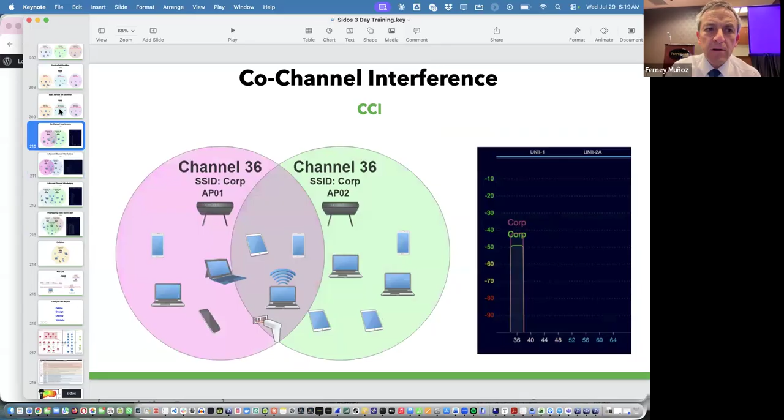Let me see if I found a better graph that helps. Let's just say this, okay? Let's bring this one.

I actually think I have a better one in it. Well, because this is all from one AP, but let's forget the one AP for now. If I have right here in this place one AP covering this area, and then I have access to multiple APs in different channels for high density, that's good. Because then I can limit that each AP receives, I don't know, 50 users. And then I'm going to have capacity available for multiple devices. I can have 300 people here, and some people will join one AP, others a different AP, but we need multiple APs in the area.

Now, why are we talking about this cell overlap? The good one, of course, is that there are multiple channels. You need multiple signals in a place to provide for roaming. If I am connected to one AP and the signal is getting weak and I'm moving along the way, what do I need to roam to another AP? I need another AP that has a good enough signal for me to just connect to that access point. So I need cell overlap. But what is the problem?

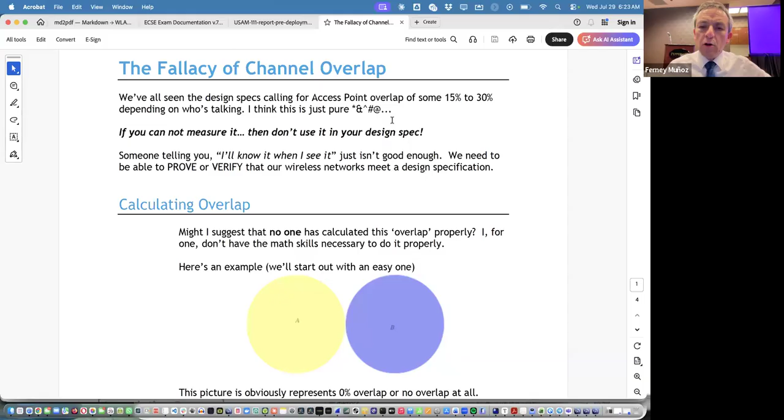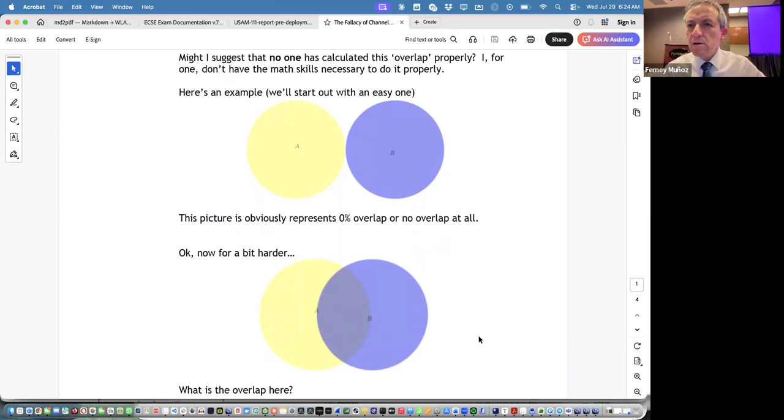Okay. How about now? Here's when I ask a question and you guys try to answer it. Guillermo, what do you think? What's the percentage of overlap of those two cells? 33%. Good, Prit. What do you think? Best guess, Ferney. Again, I can calculate that, I think, because it's a perfect sphere.

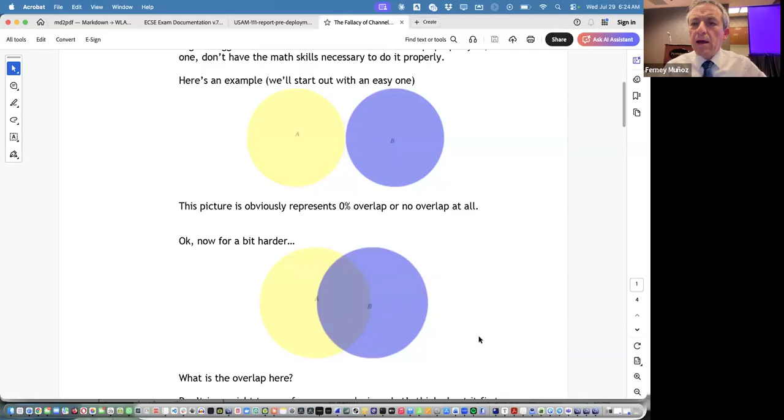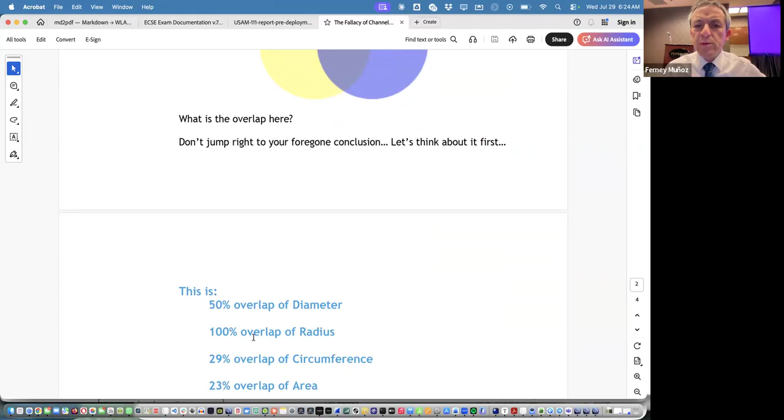And then the mathematician asked, what do you mean the percentage of overlap? Because if you analyze that, those two cells overlap 50% of the diameter. The diameter, of course, side to side, and you're only covering half of it. So it's 50% of the diameter, 100% overlap of the radius from the center to the edge, since 100% of the radius is being covered by the other one. It's 29% of the circumference and 23% overlap of the area.

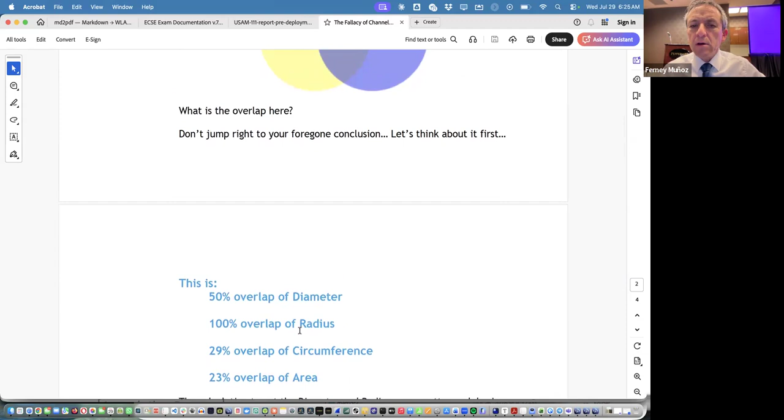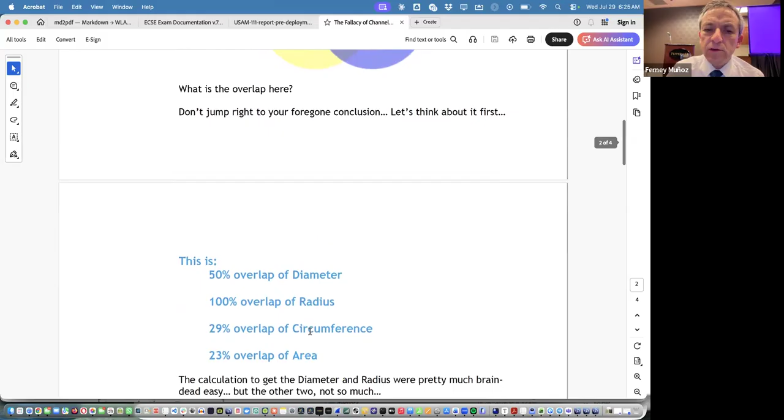So what percentage of overlap do you want? What are you talking about? And he said, oh yeah, that's right, I hadn't thought about that. But wait, you're a mathematician. How did you get to these four different percentages? 50% of the diameter, 100% of the radius, 29% of the circumference, and 23% overlap of the area. And the guy said, oh, that's easy with this formula.

I have not met a single wireless expert or Wi-Fi engineer that goes through and runs through this formula to calculate that 20, 30, 15, 25% cell overlap or whatever number it is that they are requesting or they are recommending. And he said, wow, that's a really complicated formula right there.

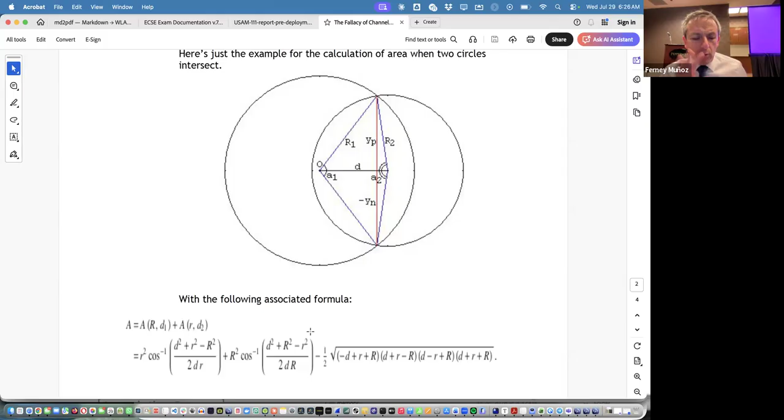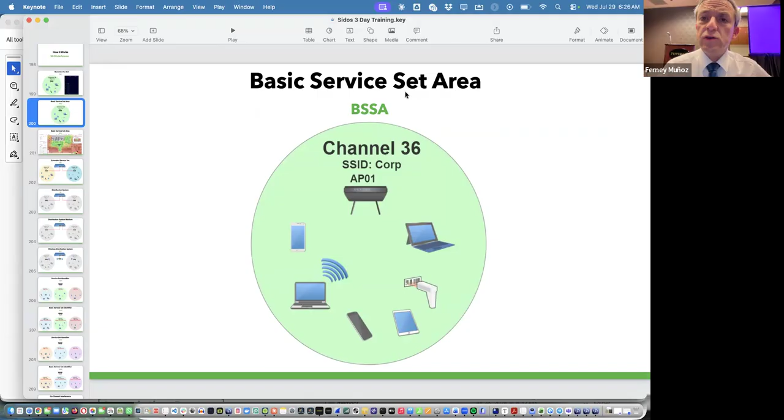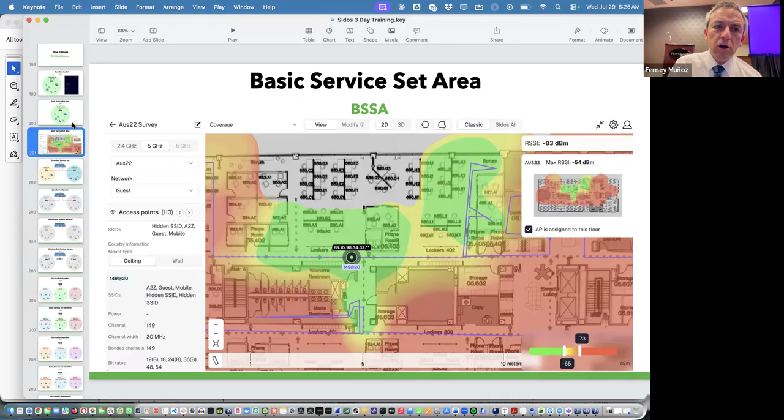But it happens that in real life, the cells we talk about when we are talking a basic service set, like the cell size and the area that this basic service set covers, is not a perfect circle. It just changes based on the environment. It's more like an amoeba. Even if you have an open space and you have an omnidirectional access point, the pattern is not going to be a perfect circumference. So he said, what if I do not have perfect circles, if I have these amoeba-looking shapes? How do you calculate that percentage of overlap?

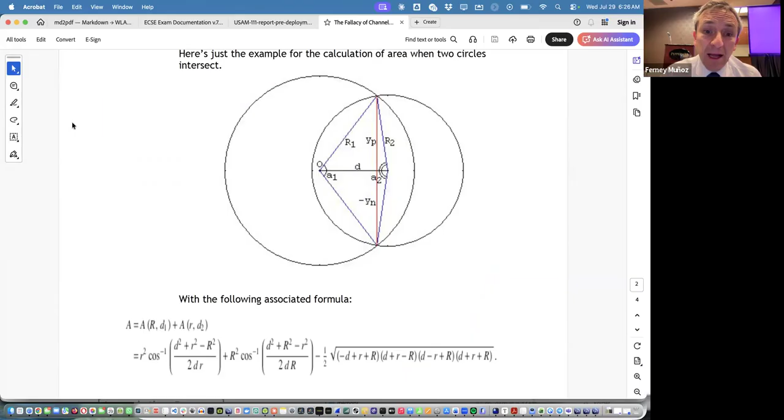And he said, no, you can't. You can calculate these percentages of overlap for these circles because they are perfect circumferences. In real life, for what we do in Wi-Fi, we cannot estimate this so-called cell overlap that customers and vendors and manufacturers of devices require. This device requires 30% cell overlap. It cannot be measured. It cannot be calculated. Why are we still requesting those from people and trying to put that as a requirement in any Wi-Fi project? It just doesn't work that way, okay?

This is one of the things that we in the industry have to educate our peers and our customers about, and I mean, this document is probably at least 20 years old. I wonder if there's a date here at the end. 2009. See, I was not far away. So it's about 17 years old. That's when this document was written. I have another version in Español.

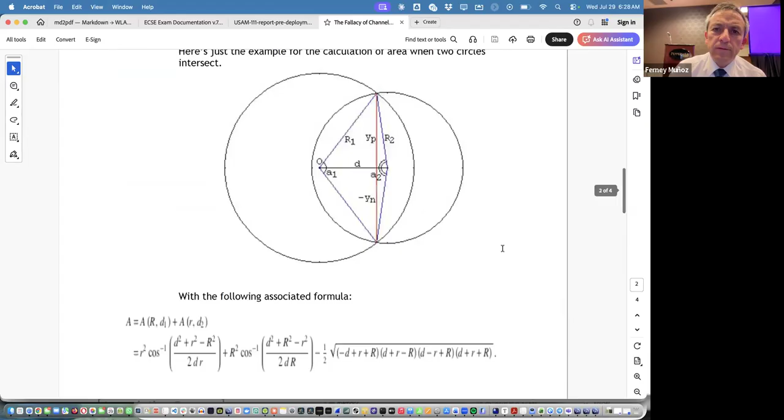These documents are, if you go to toolbox.WLANPros.com. Actually, I think I can open it here in my browser. I think that's what the shortcut was. Will it bring me here? Maybe not. So I can open it in my browser right there, or you can download the app. If you have not downloaded the Toolbox, download it. I also have it installed down here. Make sure this is the right one.

In there somewhere, I don't know if it's in educational resources or quick reference, but that document, the fallacy of channel overlap, is there somewhere. Have any of you opened that from here and know where it is? Let's see, I can make a search. Yeah, I tried searching for Fallacy. I couldn't find it there, but I found the actual document on the Wireless LAN Professionals website. Can you post the link on the chat? Yep, I already did. Okay, so there it is. You can just download that document and use it as a reference.

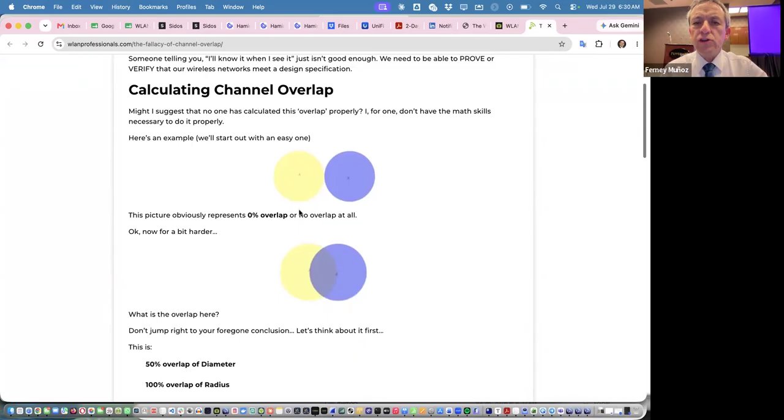So if you cannot measure this cell overlap, what do we do then? How do we tell customers, well, we cannot offer you 30% cell overlap, but what we can offer you and design for is to have a secondary signal, to have two signals covering the same place. So in design, let me just open. It's so hard to work with just one window.

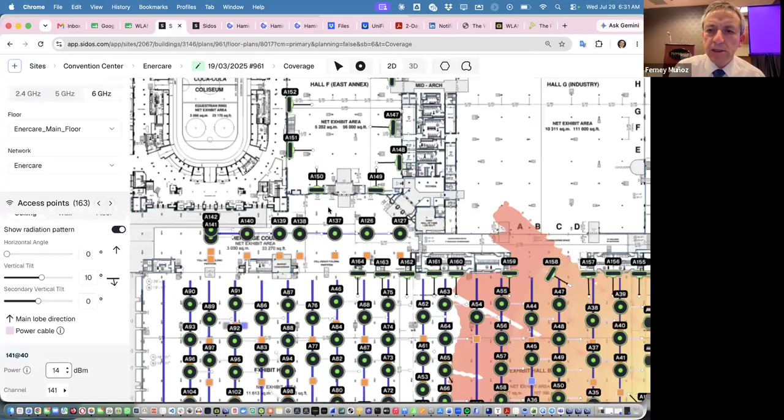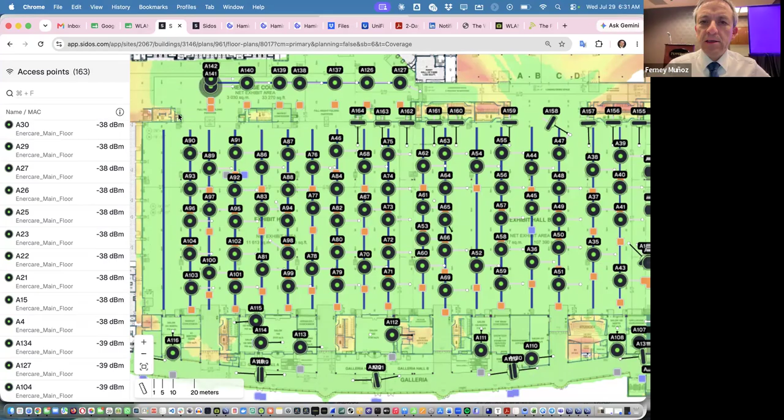Let me see if I have this design, for instance. Let me see if I can change the view from coverage to secondary coverage. So when we are talking about coverage in a design, it is basically where I have one signal at a certain signal strength. Let me create a copy of this thing, duplicate this guy.

Let me just create a new project over here. Let me change the size of this window.

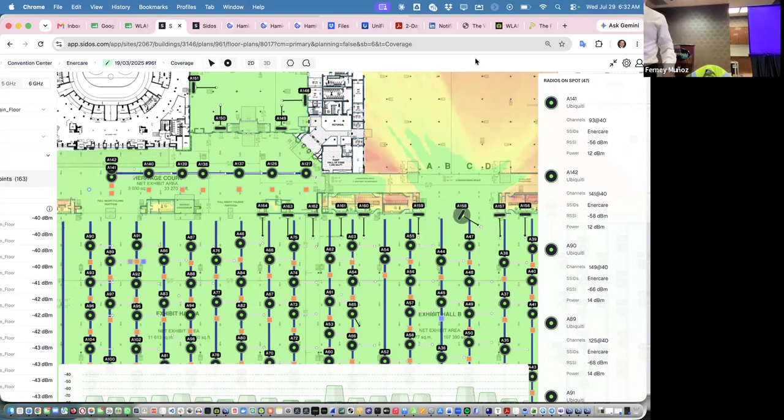No, I should get my glasses too. Give me a second. There we go. I can see now. I got my glasses on, man. I'm getting old. I used to see this just fine, but not now without glasses.

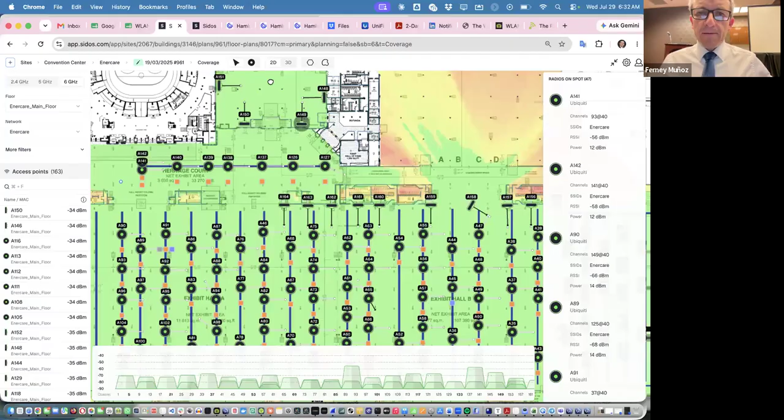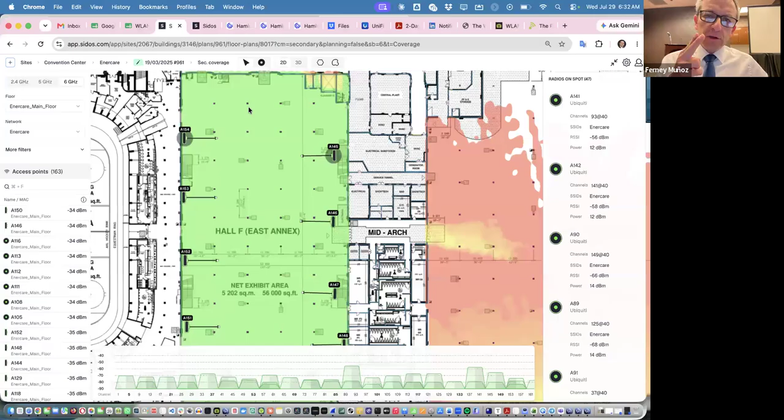So as I look at coverage, let me just use this side of the building. If I am looking at the first coverage of the primary signal, what this means is wherever I am, I'm going to have at least one signal that is at -65 or -67, whatever thresholds you have chosen in your design. If I look at secondary coverage, it's basically asking where I have two signals at -67 or better. Let me just use this space over here in this north hall area.

Just add an access point in here. Let's just put a Cisco 9105. Just change this to omni. That works. Just place one of these guys over here. I'm gonna have to refresh this guy. I had this open for a while. Sometimes you have to do that. One second, let me make sure that I have a file in here that is gonna work.

We create a new project in Ekahau real quick. Let me bring in a map. Loading. Ekahau's taking its sweet time. Oh, let me share my screen again. Looks like I stopped sharing.

Oh, looks like Martin is out there in the water. Hey, don't drop your phone in the lake, Martin. He's enjoying his day out there. It's good for you, Martin.

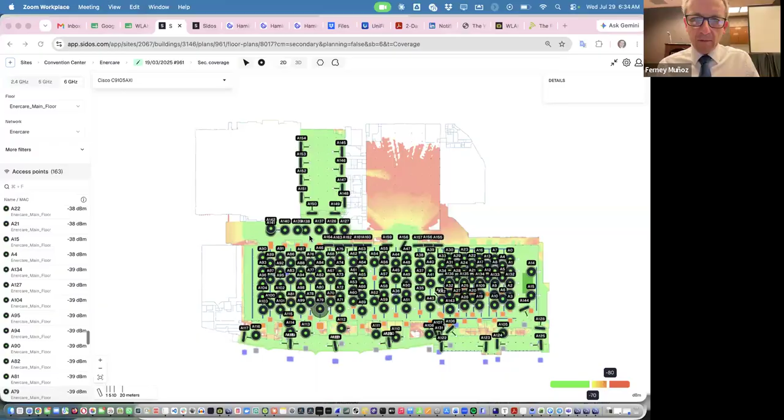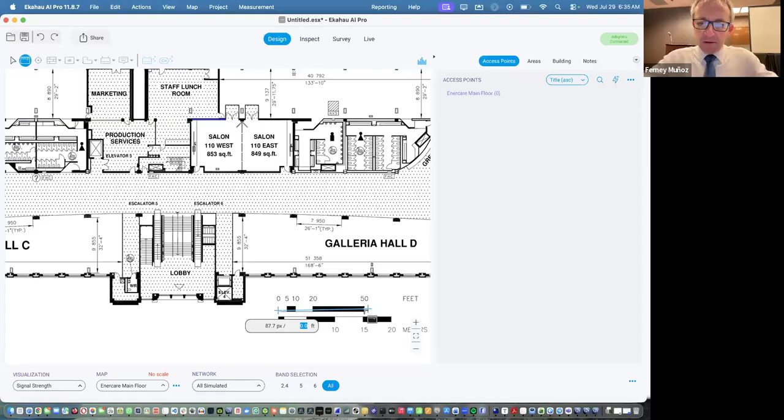Okay, come on, Ekahau. Loading, loading, loading. Here we go. I have this map over here. Let's give this guy a scale. Right here, this is 50 feet. Let's do it again. Right here is 50 feet. All right. So if I add an access point,

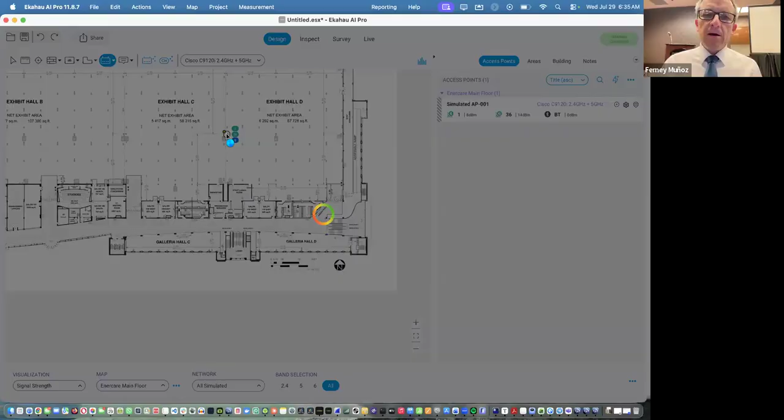get a Cisco 9120. Hey, we could even use that Aerohive AP, but it has negative gain on that. Let's just use this Cisco 9120. So if I place that access point over here, and since I haven't added any walls or doors or anything, Ekahau assumes this is one big flat open space. So this would be that AP.

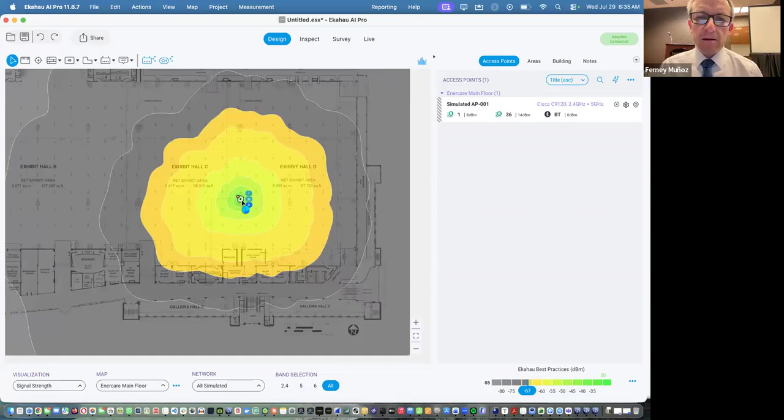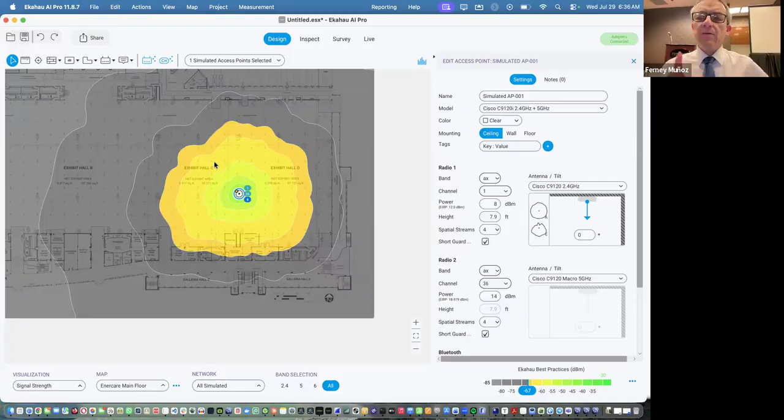Let me just move. Man, these windows from Zoom keep getting in my way all the time. So it's that AP with that radiation pattern at 7.9 feet from the ground, being an omnidirectional antenna. That's the pattern it creates. So what it shows is that wherever it is yellow to green, it's -67 or better signal. So that is where I have my primary signal, where it's good. Where it's gray, it says that it covers -85 or stronger. That'll be the threshold that basically will make other Wi-Fi devices stop.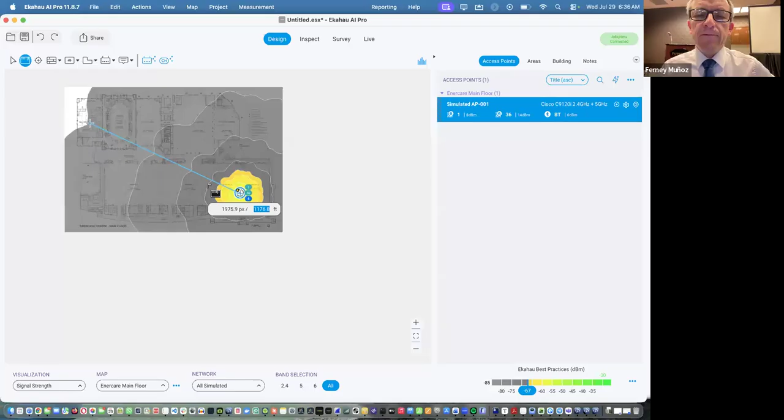If I measure the distance of the coverage from this guy all the way out here, I can still see it at 1,176 feet. This is just doing RF math on a big open space. Of course, again, I haven't drawn any walls or doors or anything in here. So let's just say, for instance, I need coverage in this entire space down here, so I'm going to have to add more access points. And this is not a design, okay? I'm just showing you the concept.

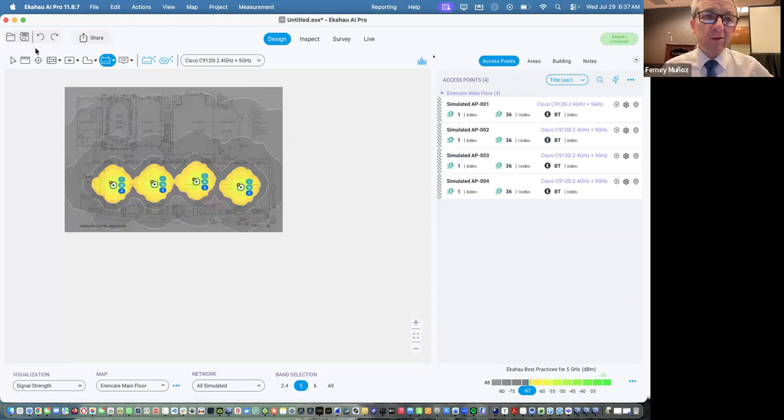If I want to have signals everywhere, just bring this guy over here, and then, let's say, with these 4 access points, I cover at least this stretch over here. If I look at 2.4, that'll be the coverage in 2.4. If I look at 5 gig, this will be the coverage in 5 gig. Yes, looks like at 5 gig, I'll have some gaps in between. So if I move this AP over here, then now I'm kind of getting there. Of course, there's going to be some gaps in there. So this is just a rough example to show you the cell overlap.

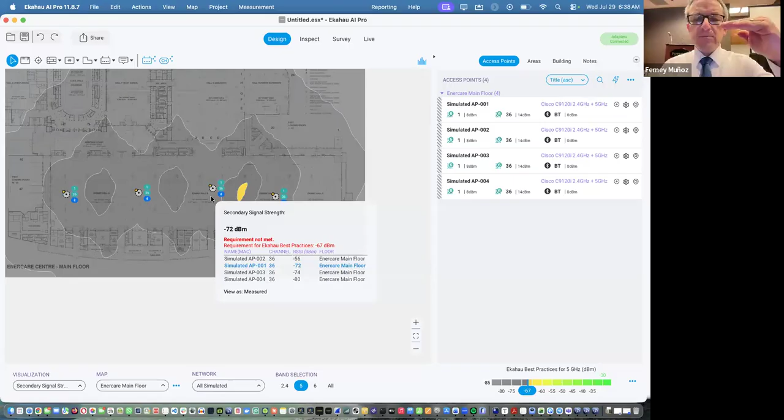So if I want to look at my secondary signal, because this is the first signal, where it's yellow to green, there is one signal at negative 67 or stronger. If I look at secondary signal strength, notice that what it says is that only in this area over here, there are 2 signals at negative 67 or better. And some people say, but why isn't there a signal right here if I'm under the access point? Because what Ekahau is estimating is the first signal right there is at negative 56, but the second signal that I can hear is at negative 72. So I'm not meeting the requirement.

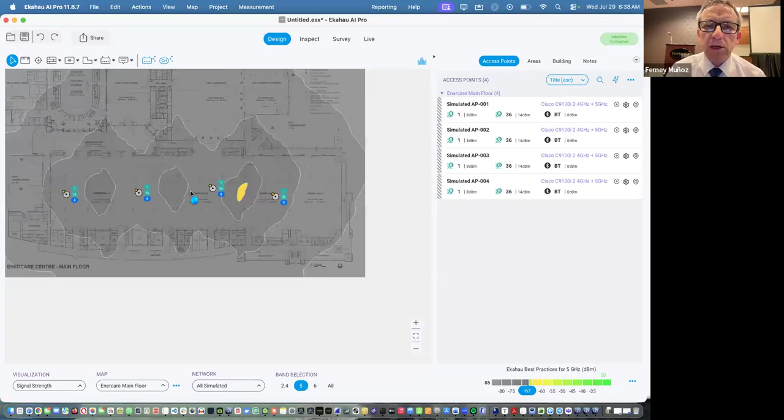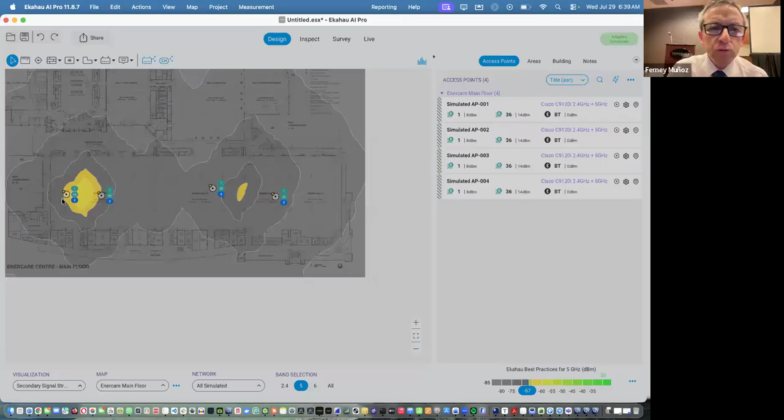If I need 2 signals everywhere at negative 67 or better, then I'm going to have to add more APs, because evidently with this, I don't have enough secondary coverage. When I talk about the primary coverage or signal strength or just coverage, this is kind of a bad example, okay? Because I'm just barely touching those cells. But then you may say, okay, what if I move these access points closer? If I move this AP right here to have cell overlap, now if I switch back to my secondary signal, those 2 APs are providing secondary coverage to one another only in this space.

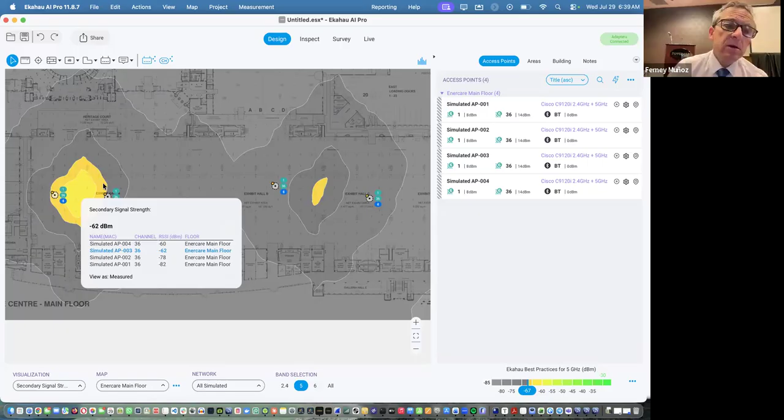So when you talk about secondary signal, to have 2 signals at negative 65 or negative 67 everywhere, then you're going to need more APs. And when do you need 2 signals? Again, when you're roaming, you're going to need two signals everywhere. If you have high density, you're not only going to need two, you're going to need 3 or 4 or 5 signals in the same place. You're going to need multiple signals covering the same places. So we got here talking about the percentage of cell overlap. It cannot be measured, cannot be estimated.

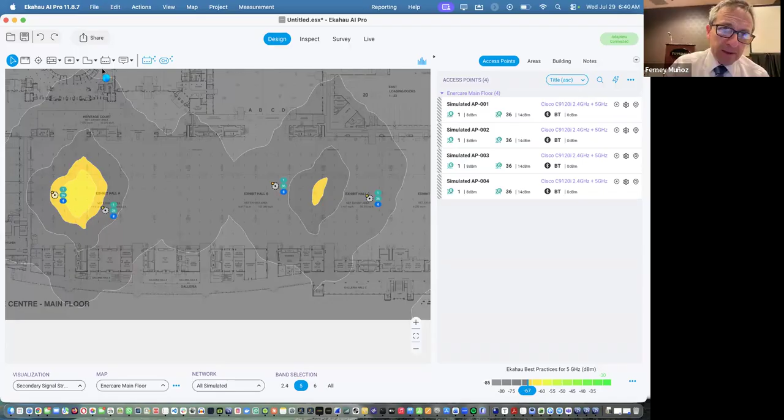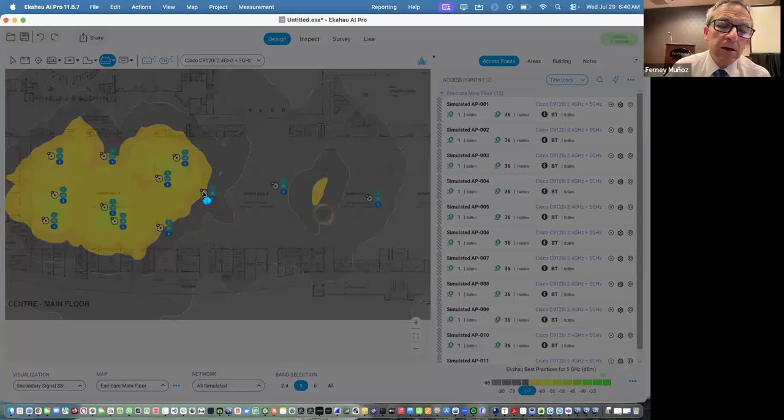If I need to provide secondary signal everywhere, then I'm going to have to start adding more access points. Let me go back to my access point tool and start adding access points. I know this is a bad example because this is all open space, but if I want secondary signal everywhere, we're going to have to add access points. And that's when the salesperson says, yes, you need more coverage, we just put more access points everywhere. The problem is that right now we're just looking at coverage, not interference. Wi-Fi interference, as we talked yesterday, is when you have multiple radios in the same channel covering the same area. So you're going to have lots and lots of interference here.

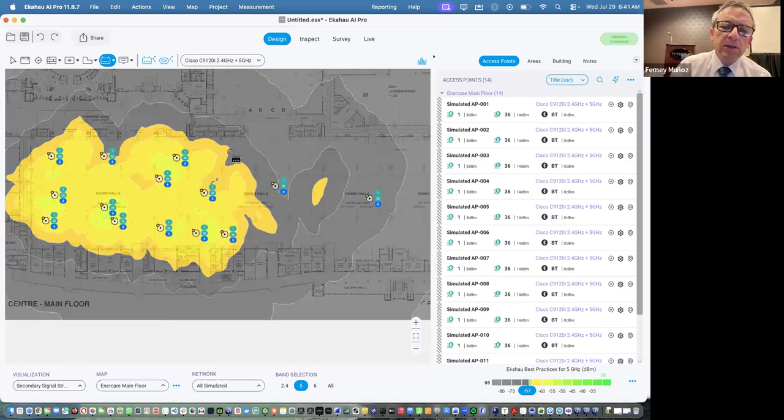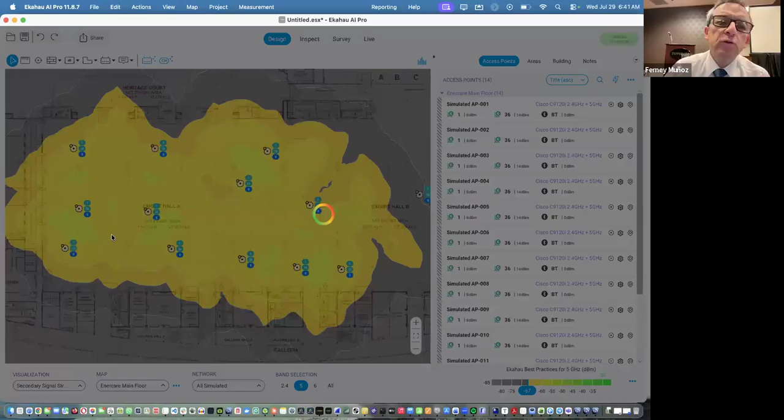Let me probably stop right here because this is just going to take forever. Okay. Let me resize the screen and focus on this area only. So now if I move things around a little bit, you can see that where it's yellow to green, I have 2 signals, not a percentage of coverage. Everywhere that is yellow to green, you're going to have at least 2 APs. See, the primary is at negative 47, the second is at negative 65, the third one is at negative 66, and actually I have 4 APs right there providing coverage for this area.

We don't talk about percentages. We don't talk about 30% cell overlap. We don't talk about any value that is not measurable. It doesn't make sense. It cannot be calculated. It cannot be measured. So don't put that in your RFPs, in your projects, in your reports, specifying that we are designing this to provide 30% overlap. It cannot be measured. Questions or comments about this concept? The reason I bring it up is because recently I had that question being asked.

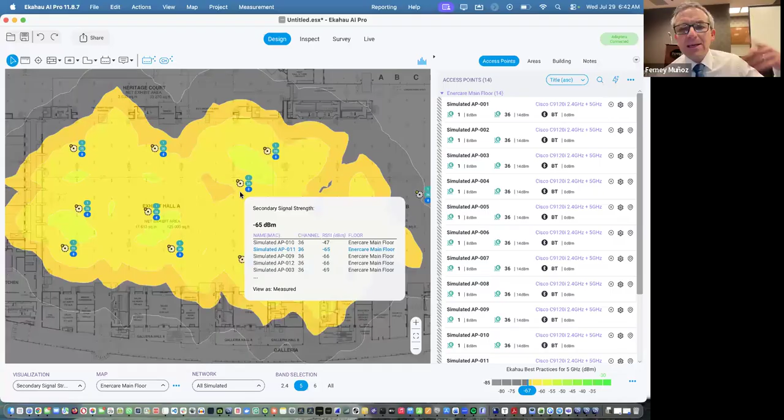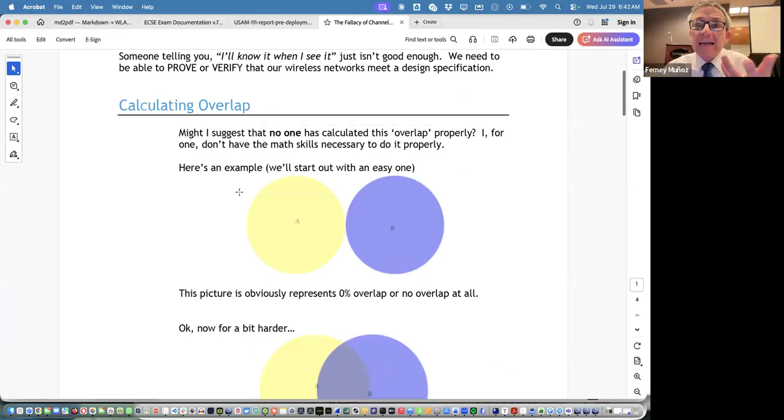And during the last class, somebody also sent me an email asking how this would be estimated, because people are asking for it today in documents, in RFPs, we keep seeing it. And we as an industry have to educate everybody, interns, coworkers, partners, customers, about this concept. It's been in documents forever. And the big companies, as Gurpreet was saying, Cisco has it, Aruba has it, everybody's got it somewhere in their documents. So you've got to make sure that is something you discuss.

Hey, come on in. Hi, you are.

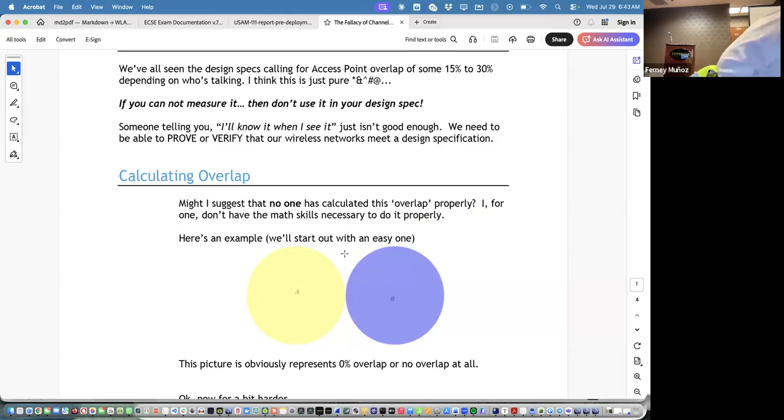No problem. Yeah, we're just finishing up a session, and we'll be here. Yes, absolutely. Yeah, we got access yesterday, and everything's set up and ready to go. Yes, appreciate it. All right, see you in a bit.

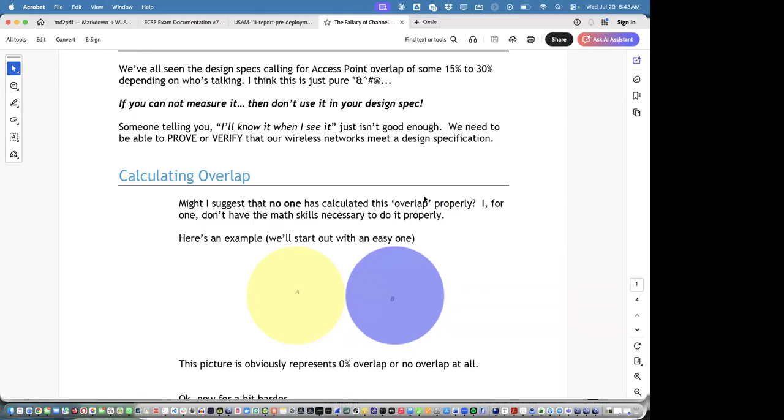All right, Ned, you have a question? Go ahead. Just a comment. I've seen as many designs and deployments ruined by too dense of an AP deployment as too few. Yeah, absolutely. And the reality, of course, is that that's why it's complicated.

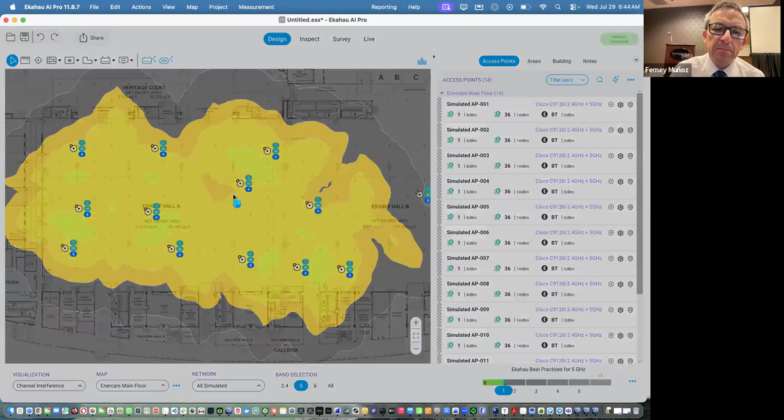Because if you add too many, let me go back to Ekahau. If we switch over, of course, once you place the APs in Ekahau, they're all on the same channel. So if we go to interference here, it's going to show lots. Everywhere there's massive interference, because it says that 14 APs are on the same channel. One AP in this area covers the entire thing.

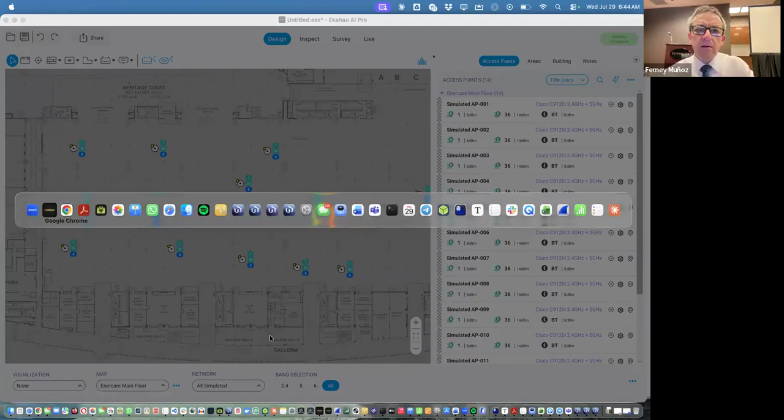So if I do a channel planning and say, okay, just put everything on different channels, it goes and does its thing. While it does that, let's just go to Hamina, number one design tool out there.

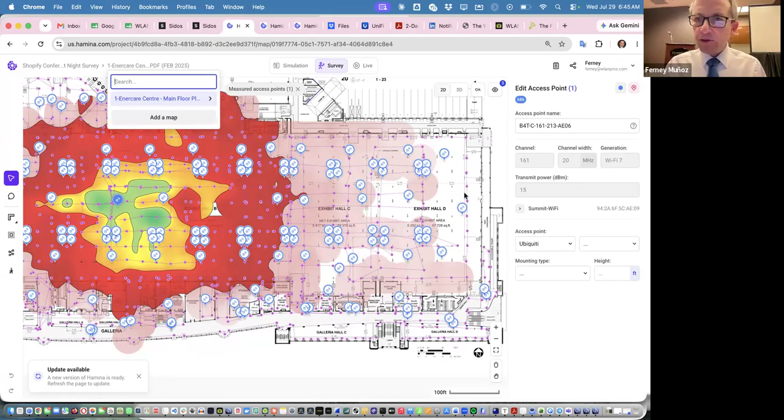Let me make sure I have it. Just create a new one over here real quick. Just duplicate this guy. Actually, I have a smaller one here. We can use this one. It's okay. These Zoom windows keep getting in my way. Let me move this out of the way. Okay, let's come over here and duplicate this guy.

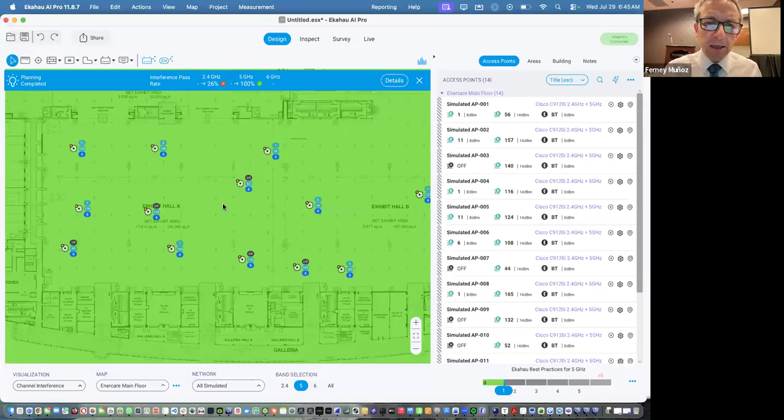Let's see if Ekahau is done. Yes. So now it placed all of the APs on different channels. See? And in this case, it shows that there is no interference. Now, if I go to a wider channel, for instance 80 megahertz wide channels, we go down to 6 channels only. If I place those in 80 megahertz wide channels, then it does its math.

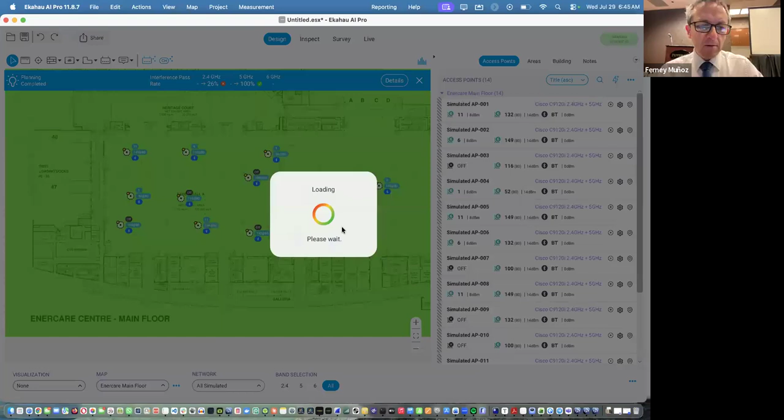Let's go over here. It's a big project. Maybe I'm better off creating a new one. Oh, that loaded. So now let's bring access points in here. Just go to my simulation. Let's just place an access point, let's place an Aruba 635, and bring that.

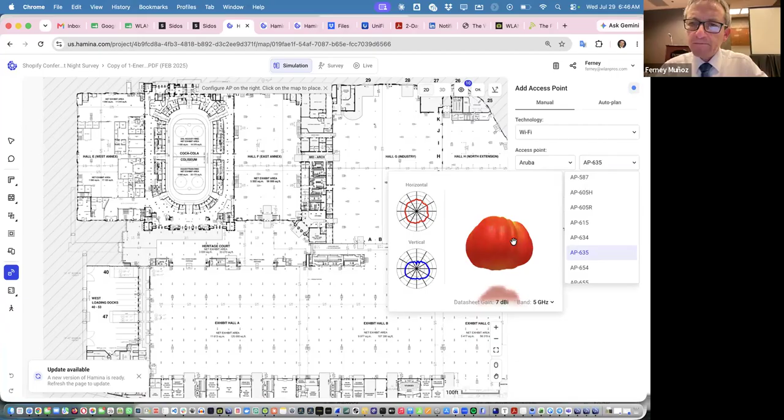My internet here is somewhat slow. That will be the radiation pattern of that antenna. So we place one of those over here. It's not a circle. That's why it cannot be simply measured or calculated. So that will be my primary signal. Let me close this, update available.

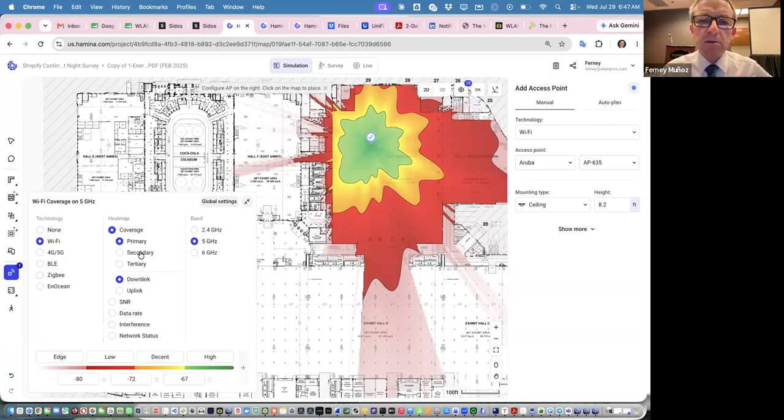If I switch to my secondary signal, see, I'm on 5 gig right now, and I ask what's my secondary signal for this guy, it's none, because I only have one radio. So let's look at the channels. Let's do the same exercise as we just did with Ekahau, and move this guy over here.

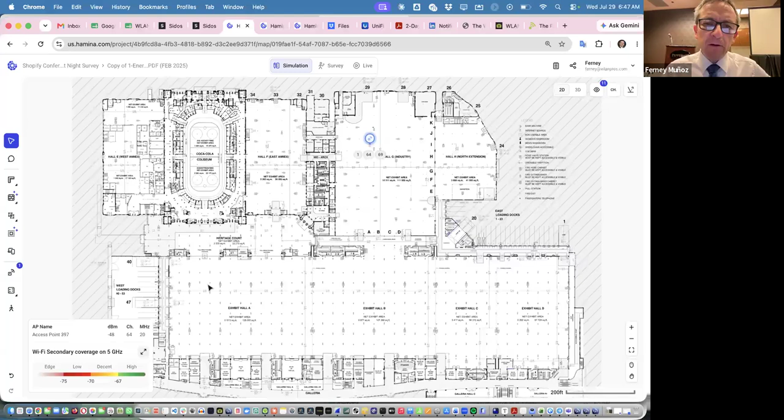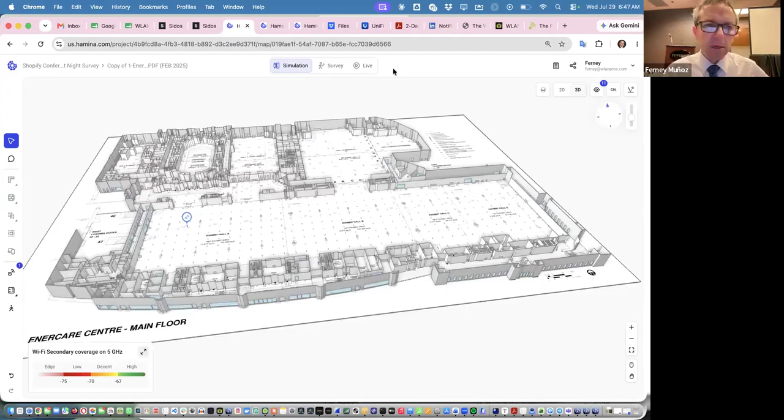If I want primary signal in this open space, of course, I don't have any walls. I could draw walls here. Whoa, look at that. Holy smokes. That's why I love Hamina. We have the walls right there. Sure, go ahead and draw these walls. Just go to auto draw and auto draw those walls. Okay, now we have walls.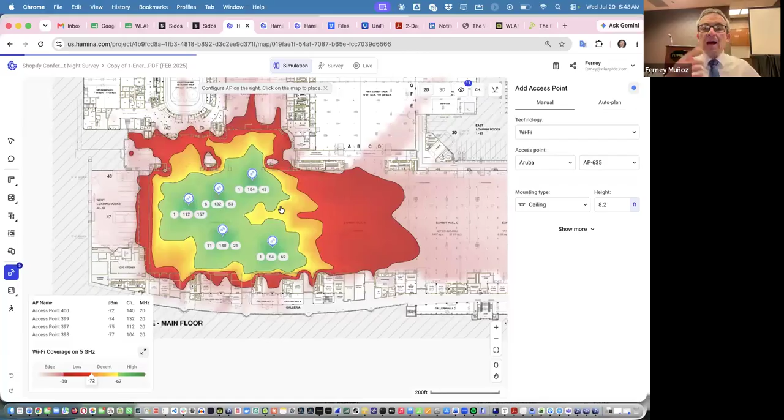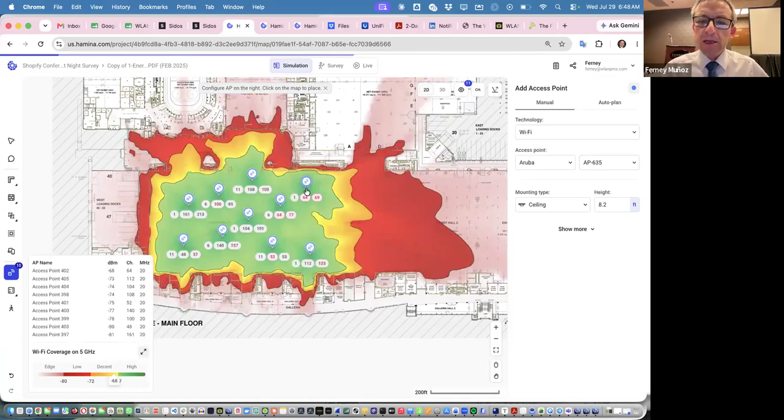If I then go back to access points and say, show me my primary signal, and I have this access point there and place another one here and another one there, notice that automatically as I'm going, Hamina will change the channels for me, making sure they're not on the same channel, see? And since I'm on primary signal, let's just zoom into this area and worry about this area only.

So if I just want to provide coverage for these guys, then there I have my primary coverage. Just add another one in here. Okay. If I switch to secondary coverage, now I'm going to have some gaps. Where it's green, it's at -67 or better, 2 signals, okay? Where it's not, then I don't have secondary coverage in those areas, okay?

So in here, if I want 2 signals everywhere for roaming, for density, for redundancy, for whatever, because see, right now, this area doesn't have secondary coverage. If this AP dies, then there is nothing in there. So secondary coverage, if I have, let's say, this access point right there, and if I put another AP, let's say down here, now these 2 are providing coverage in this green area.

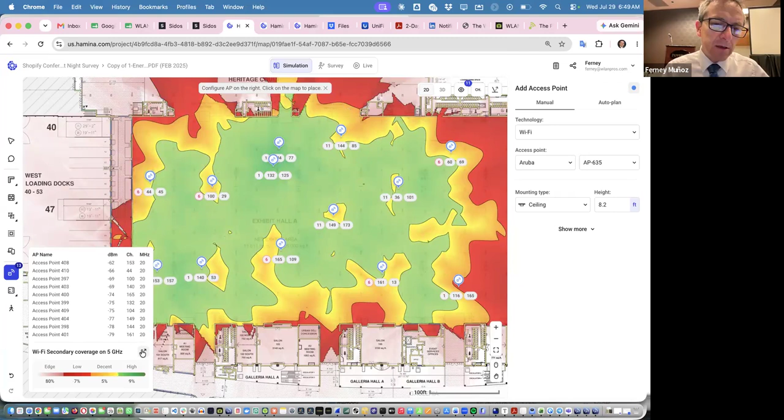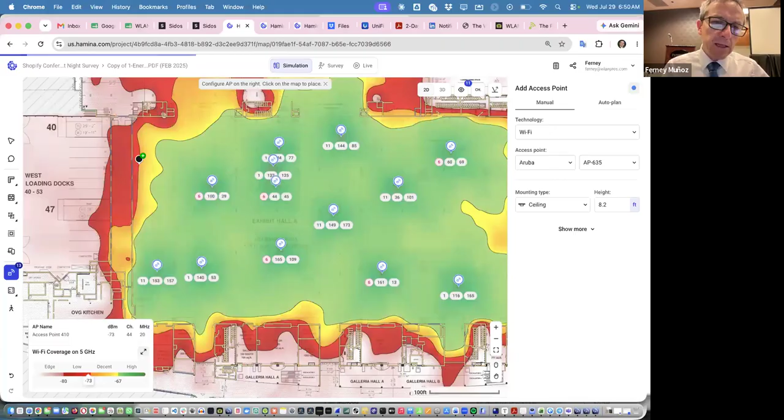So if one of these APs dies or goes away, just come out here, then now I have this guy providing not enough, but at least I have a primary in there. See if I switch back to primary, there is a primary, there's not a secondary, very well, but for redundancy, at least I have a primary coverage. When this AP goes away, this area is not going to have much primary or secondary.

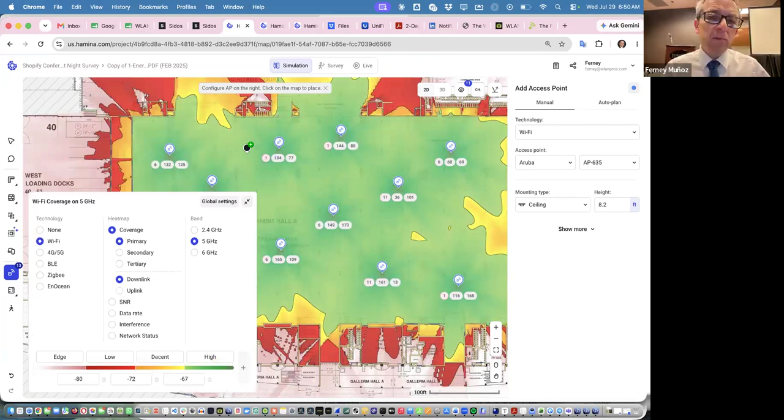So the concept of secondary is not then calculated in percentages. It's just overall having a secondary signal. And if it's everywhere that you need a secondary signal, then you're going to need more APs. And yes, with that comes more interference.

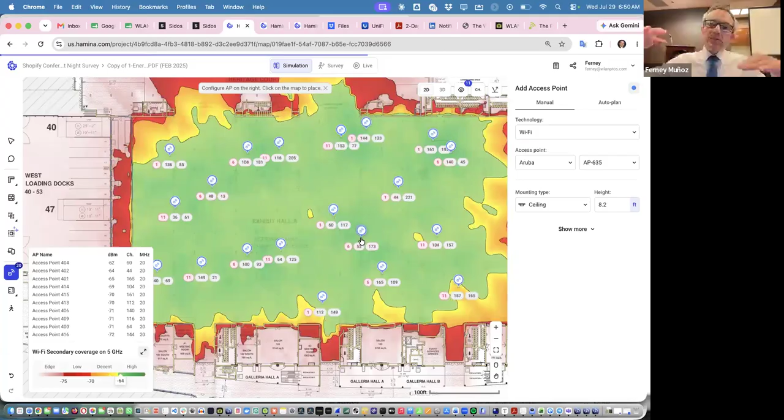And that's when the software and the human has to fight to try to make this work without generating another problem. So you fix the secondary signal problem, but then now we have so many APs, as was it Ned that was mentioning, that you have too many. Now, yes, you have a secondary cell overlap or third or fourth cell overlap, but then now you have problems with too many radios covering that space.

Hey, morning. Whatever you need, cabling wise. Oh, perfect. Thank you very much. Internet. Yes. So let me finish this right here. In 2 minutes, I'll be with you. Yes. Thank you very much.

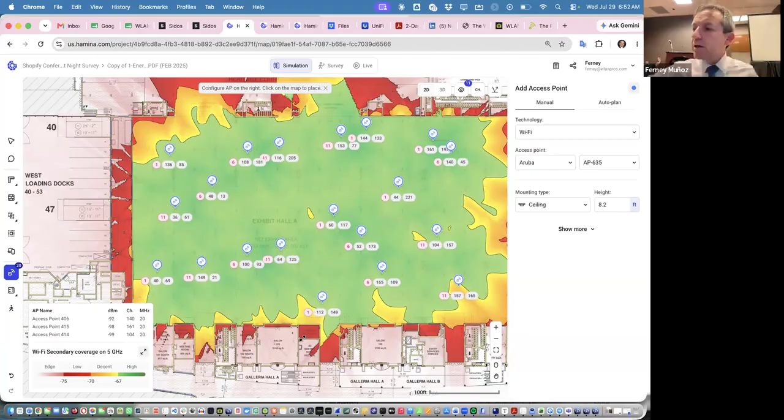Today, we talked about cell overlap. Not the bad one, you know, because overlap when you have like channel 36 and channel 36 on the same one, they see each other. Yeah, that's bad overlap. We're talking about the good overlap, the one that we basically need multiple signals. And we focus today in the fact that you cannot get a percentage of cell overlap. That has been a topic of discussion for many years, and that's still true today.